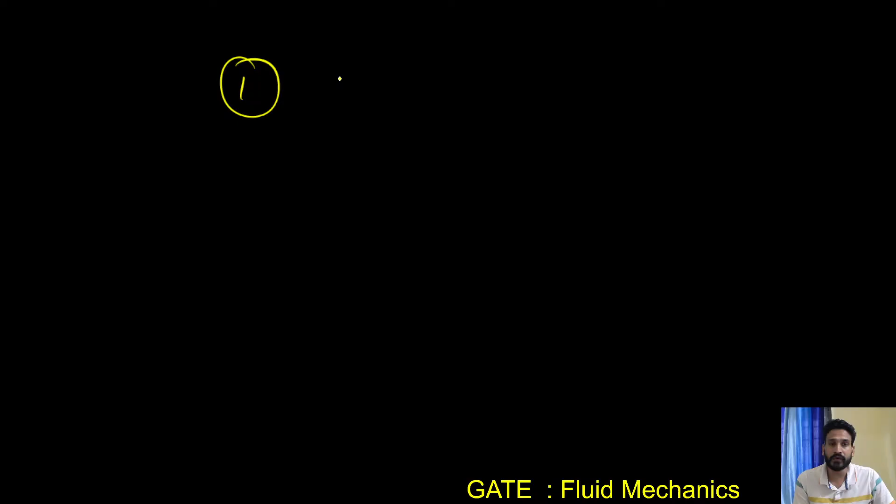One is those fluids which follow the Newton's law of viscosity, and other fluids which don't follow the Newton's law of viscosity. So we have two broad categories, and majorly...

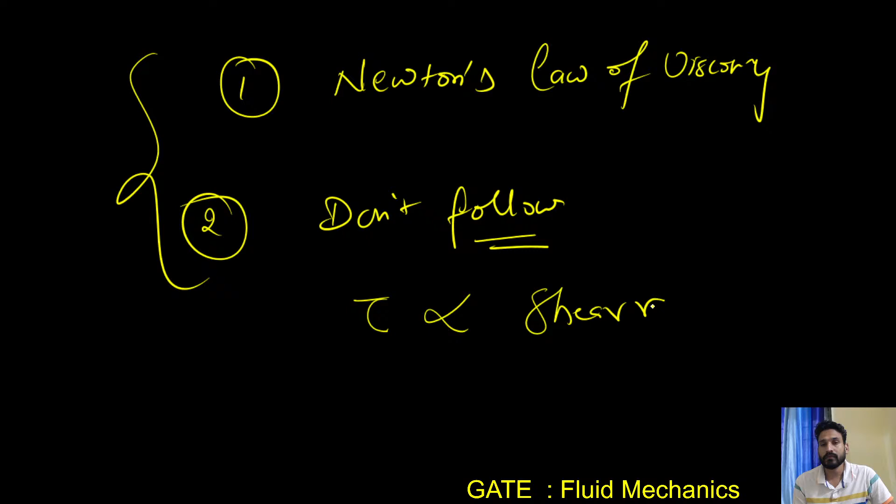Tell me if this is clear to you. In these two types of fluid, we basically discuss the variation, or the relationship between tau and the shear rate, or the velocity gradient. Is it clear to you? Or we have discussed the viscosity relation with respect to the shear rate.

So in this category we have discussed the relations between tau and shear rate, or mu with the shear rate. I hope the previous class is clear to you, and we have discussed the graph as well for all kinds of liquids, or fluids.

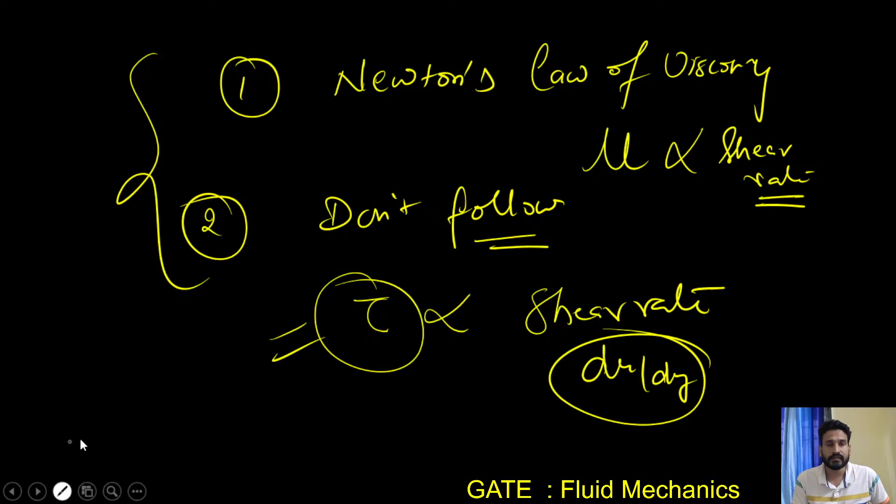Now we have two other fluids, which are basically time dependent. So the next heading is time dependent fluid.

So we have discussed the time dependent fluid. We have two fluids which are time dependent. One is the thixotropic.

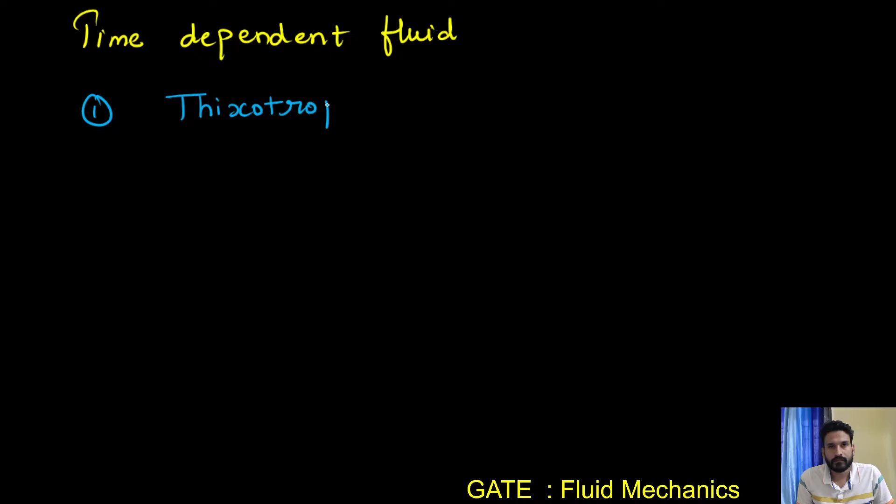Thixotropic fluids are those fluids which have the variation of the apparent viscosity with respect to time at a constant shear rate.

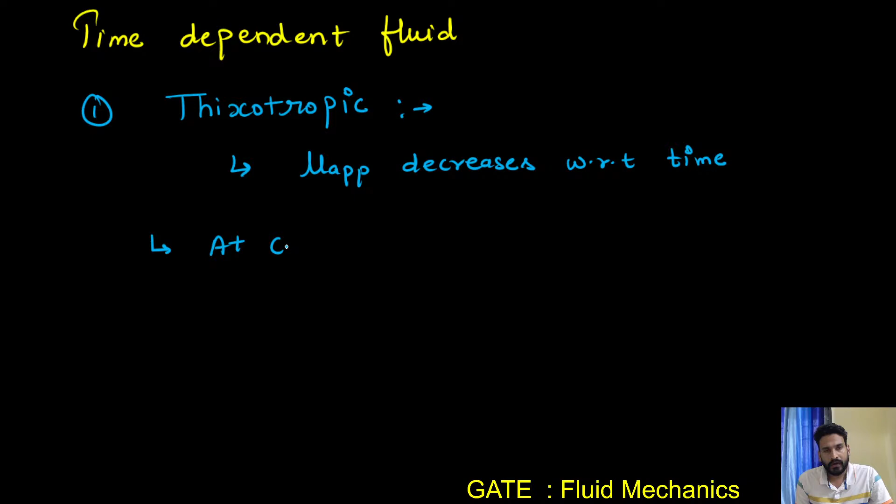So in thixotropic fluids, apparent viscosity basically decreases with respect to time. Second point: at constant shear rate, shear stress, which means tau, decreases with time to a minimum value. So thixotropic is that fluid which has apparent viscosity decreasing with respect to time, and at constant shear rate, tau decreases with time to a minimum value.

And the second statement you have to remember is that at constant shear rate, my shear stress, meaning tau, basically decreases with time to a minimum value.

Here are some examples for thixotropic, like paint, ketchup, honey. These are some examples for thixotropic. Guys, remember these examples are also important.

From this topic there are kind of two questions. One is the variation, whether it's mu with respect to time, or mu with respect to shear rate. Another question may be about the examples, like what kind of fluid is paint. In different PSU exams, they're highly likely to ask about examples, but in the GATE examination they will ask based upon the equation of the fluids and the variation. So both pieces of information are important for us.

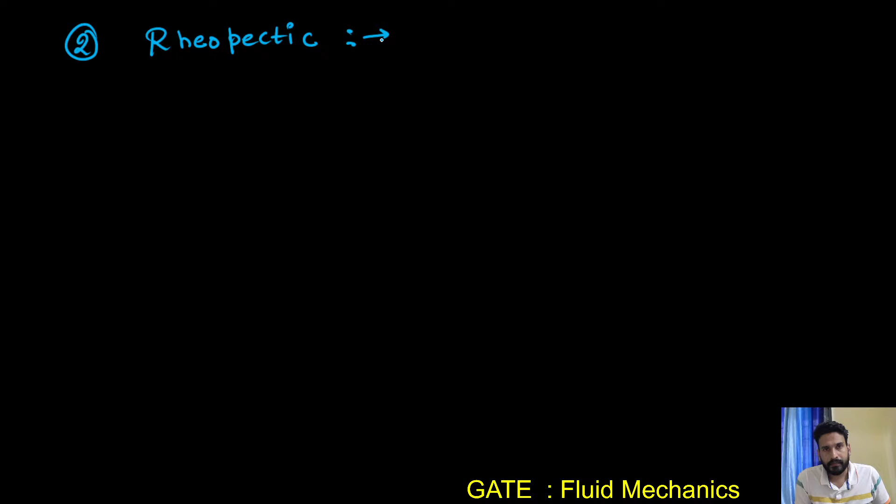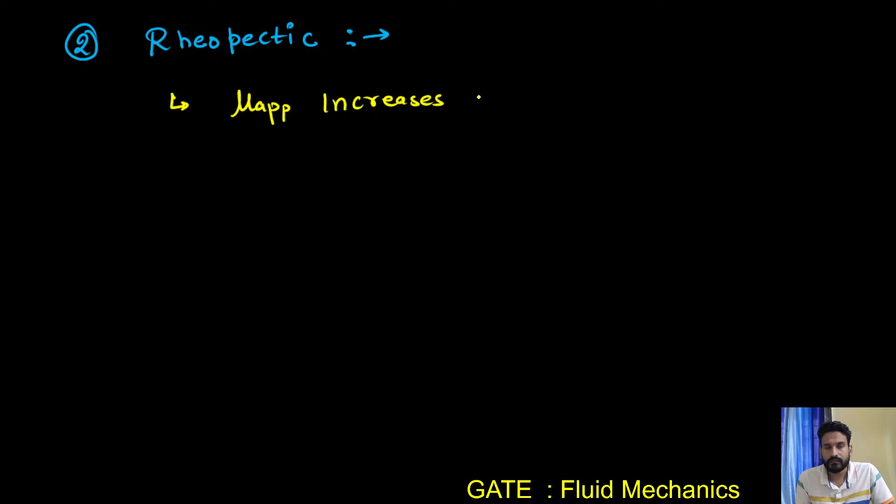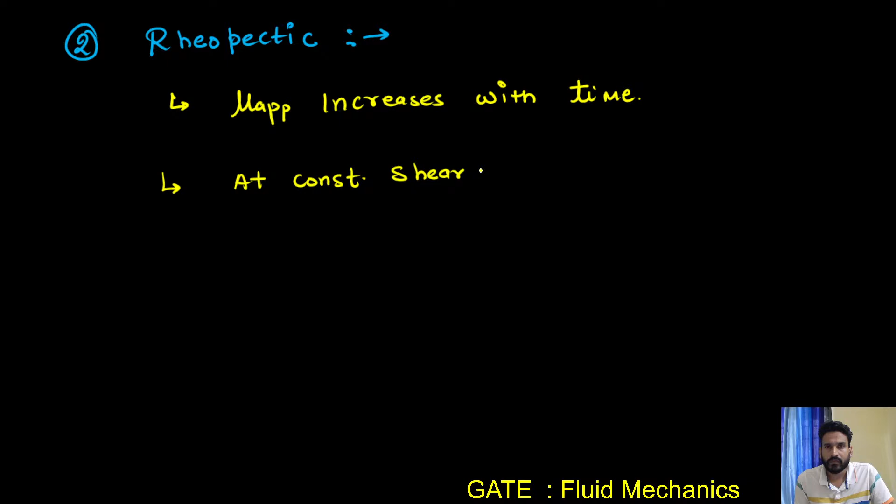In rheopectic fluids, apparent viscosity increases with time. And the second statement is: at constant shear rate, shear stress increases with time.

Right? Here are some examples, like printer ink, gypsum suspension, and bentonite clay.

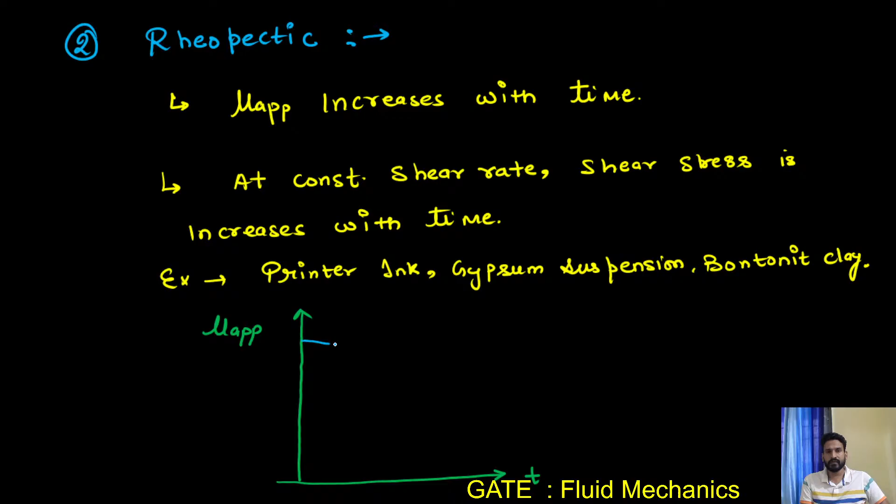So these are some examples for the rheopectic, right? So if you see the variation, or the graph, at the x-axis it is T, at the y-axis it is mu apparent. In thixotropic, mu basically decreases with time, so this kind of graph you will get in the case of thixotropic. And for rheopectic, mu apparent basically increases with time, so this kind of graph you will get.

So basically the question is something based upon the variation, that which fluid has the mu apparent increasing with time. This kind of question they may ask, right? Is it clear to you guys?

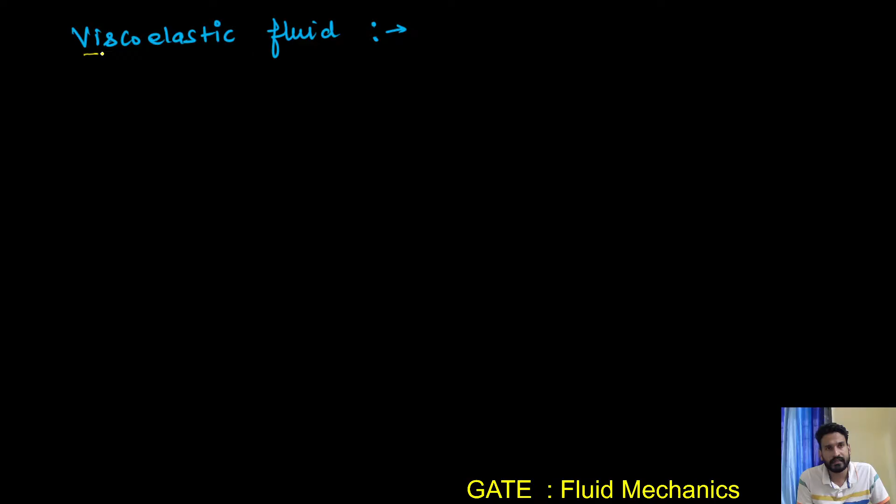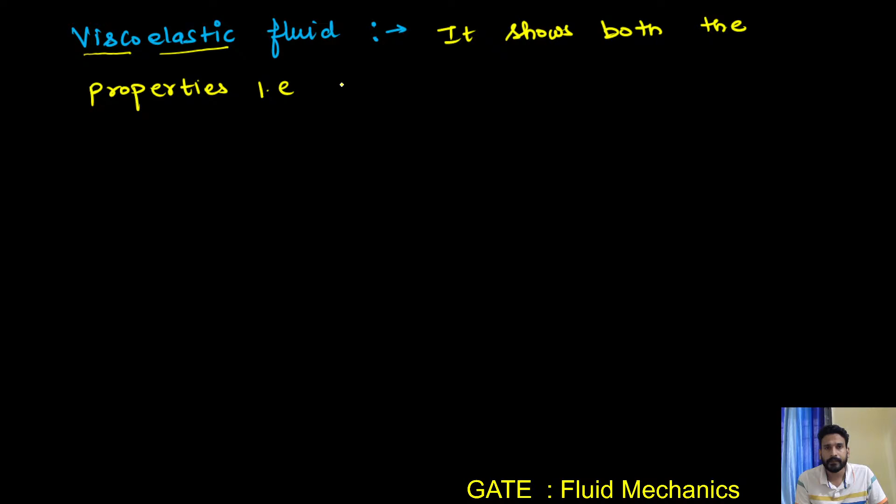Just remember the definition, right? Viscoelastic fluid. So as the name suggests, this fluid has both the properties. Visco means this fluid is viscous, and elastic means that this fluid has elastic properties also. So we can say that it shows both the properties, such that viscous and elastic, right? So it basically exhibits elastic recovery from the deformation.

What is the meaning of elastic property? Elastic property is something like that: due to this property, if you deform any matter, any object, it will try to regain its original shape. Like rubber is the elastic material, right? If you stretch that rubber, the state after stretching is not the same as initial, it is basically in the deformed state. Once you remove the stress on the rubber, it will try to regain its original shape. So more elastic, more chance to regain its original state.

So what are the materials which are perfectly elastic? Perfectly elastic materials are the ones which regain their initial shape and size exactly. They exactly come back to their initial shape and size. But most metals are not perfectly elastic, there is some deformation there. If you apply shear stress to any material, it will deform up to some extent, and after removal of shear stress, some deformation remains within it. Is it clear to you?

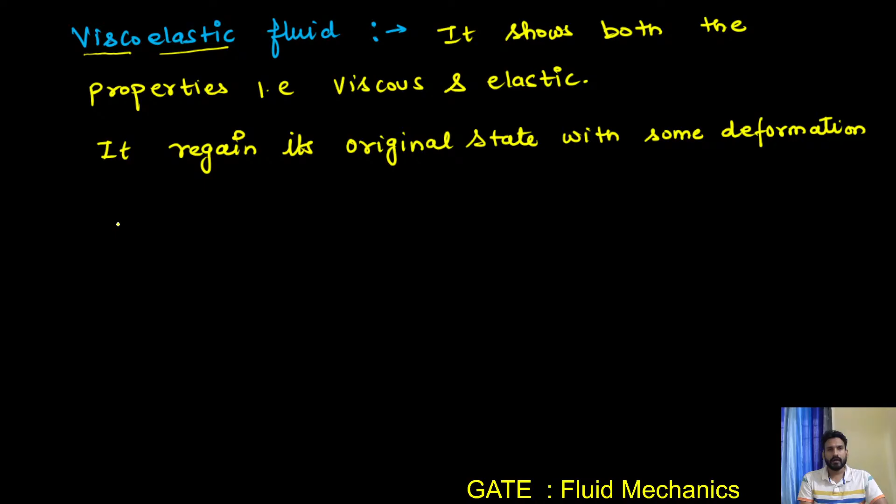So I can write that it regains its original state with some deformation, after removal of shear stress, right? And examples are flour dough, and some polymers in molten state, right? So these are some examples.

It's a very simple thing. Many times questions come on these definitions and names, especially in the PSU separate exams, right? So we will try to cover all the things for the GATE examination, for the PSU examination, and from the interview point of view also. So we will try to cover all the things. Is it clear to you guys?

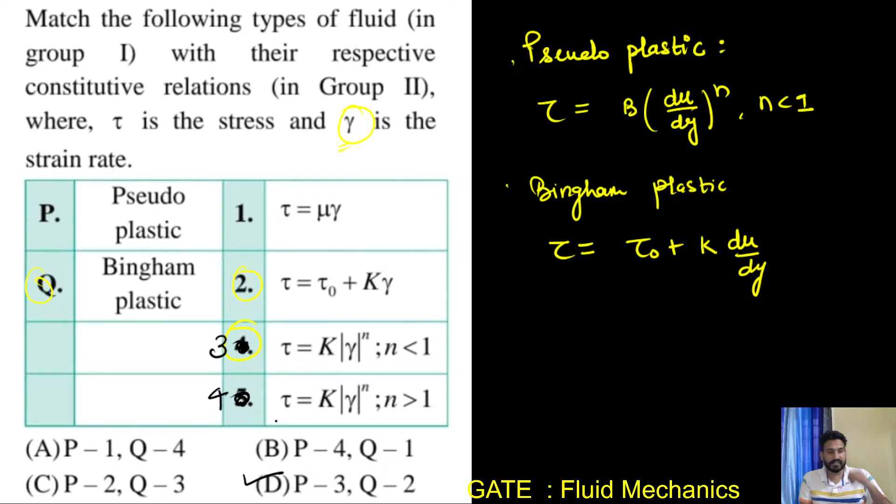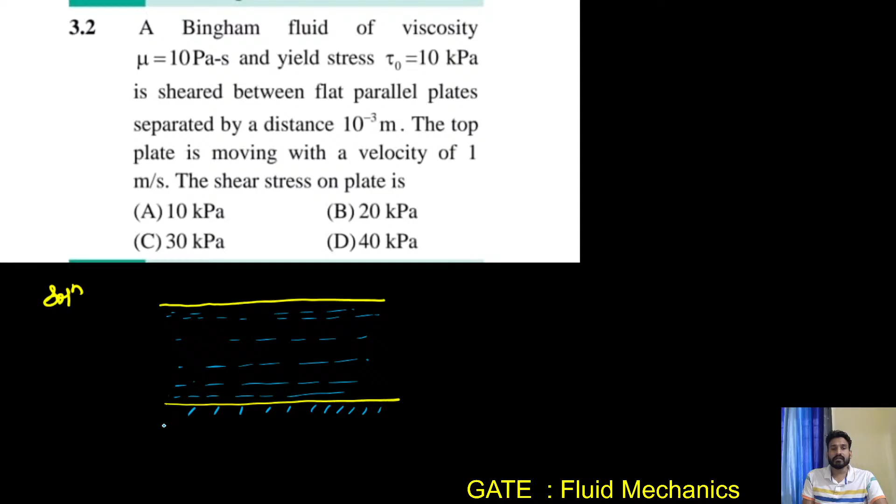So this is the scenario in this question, these are the flat parallel plates and a Bingham fluid of viscosity 10 pascal second is placed between these plates. The lower plate is stationary, and the upper plate is moving with a velocity of 1 meter per second.

Right? So always remember this information in this way: the layer which is in contact with the plate, the velocity of that layer is exactly the same as the velocity of that plate, right? So just remember this information like that.

So the bottommost layer is in contact with this stationary plate. The stationary plate has velocity 0, so this fluid layer velocity is also 0. And we know that this is the no slip condition. And the adjacent layer has the velocity the plate has. So what is the velocity of this plate? 1 meter per second. So the layer velocity is also 1 meter per second. Is it clear to you?

Okay. Now we have to find out the shear stress. Here a Bingham fluid is there, so we have the equation tau is equal to tau naught plus mu du upon dy. We have this yield stress. So just calculate the velocity gradient here, du divided by dy. Du is basically the change in the velocity, right? So this is 1 minus 0.

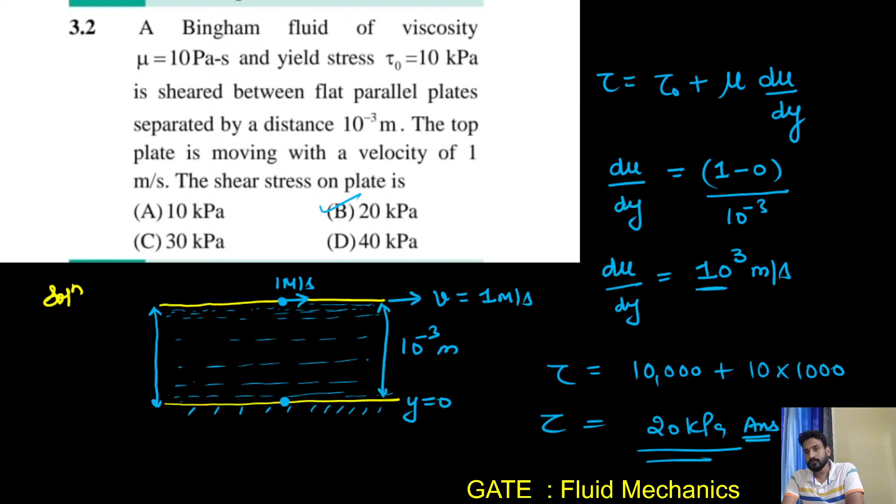Okay. If you have any doubt, you can ask. ठीक है? There is no requirement to repeat this statement again and again, because you guys are mature enough. है ना? आप सब बीटेक पास आउट हैं. ठीक है? So I think there is no need to tell you, okay, पूछो, like that.

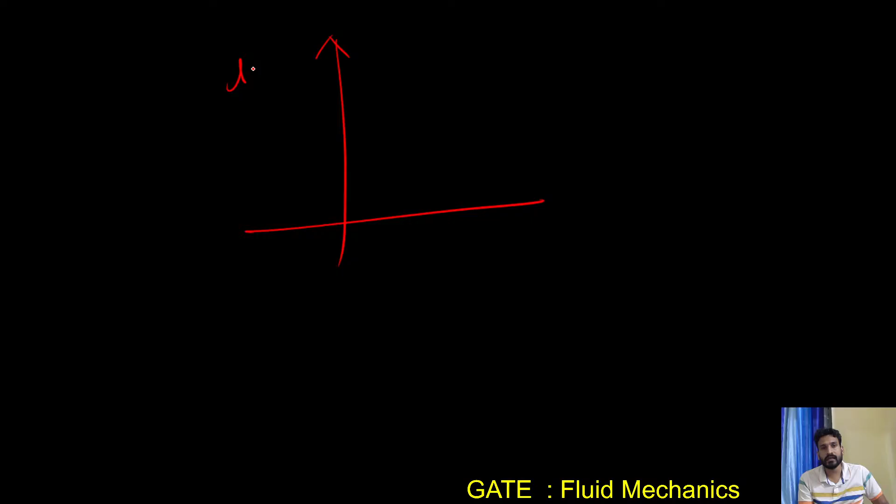So I have given you a graph between the apparent viscosity and the shear rate, where I explained that this kind of graph we will get for the pseudoplastic. This is the mu apparent and this is the shear rate, or you can say du/dy. For the pseudoplastic this kind of graph we will get, and for the dilatant this graph. If mu app is increasing with du/dy, the fluid must be dilatant, and if it is decreasing, it must be pseudoplastic.

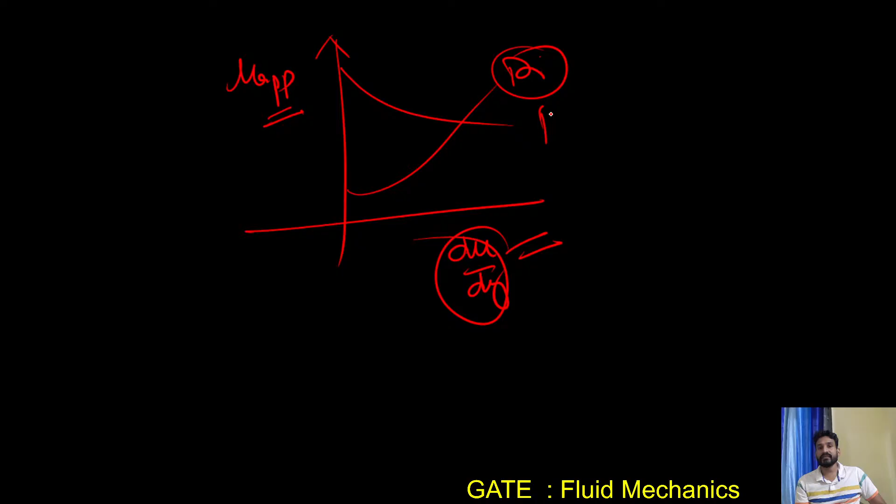So let's calculate the mu apparent yaar.

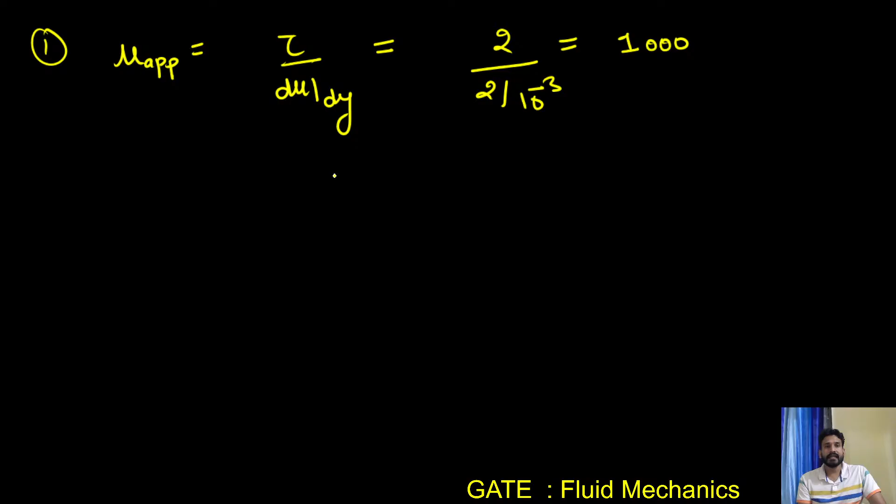Is it clear to you guys? It is 1000. Okay, let's take the second experiment and calculate the mu app. Let's suppose this is mu app 1 and this is mu app 2. What is the tau value? 3, divided by du which is 1, divided by dy which is 0.25 multiplied by 10 raised to power minus 3. Right, minus 3. Yes, it is 10 raised to power minus 3. Okay.

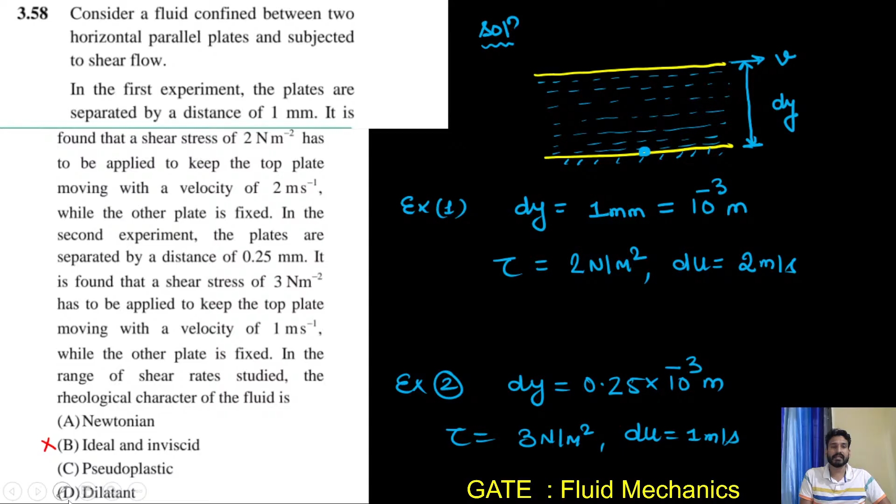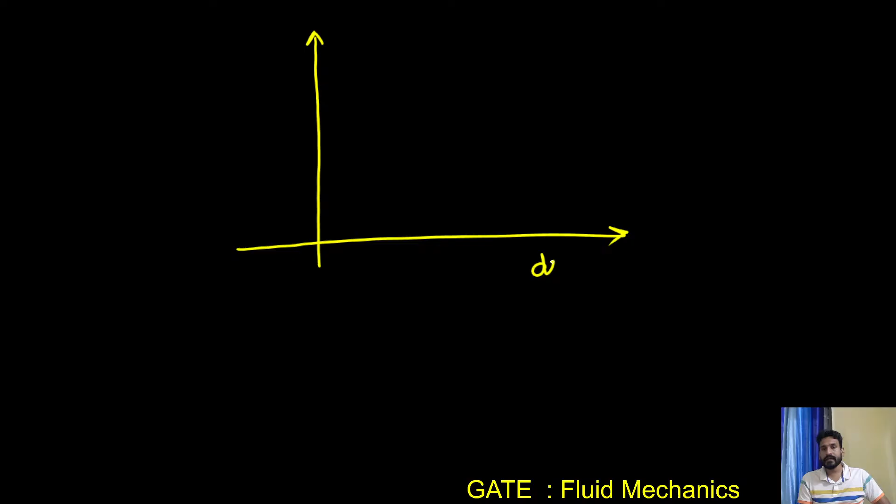So this kind of behavior we will get in the pseudoplastic. Is it clear to you? Yes or no? Arre, this is what I told you, this is the relation we noted, na? This is the shear rate and this is the mu apparent. If it is decreasing, then it is pseudoplastic, or if by increasing du/dy it is increasing, then it is dilatant.

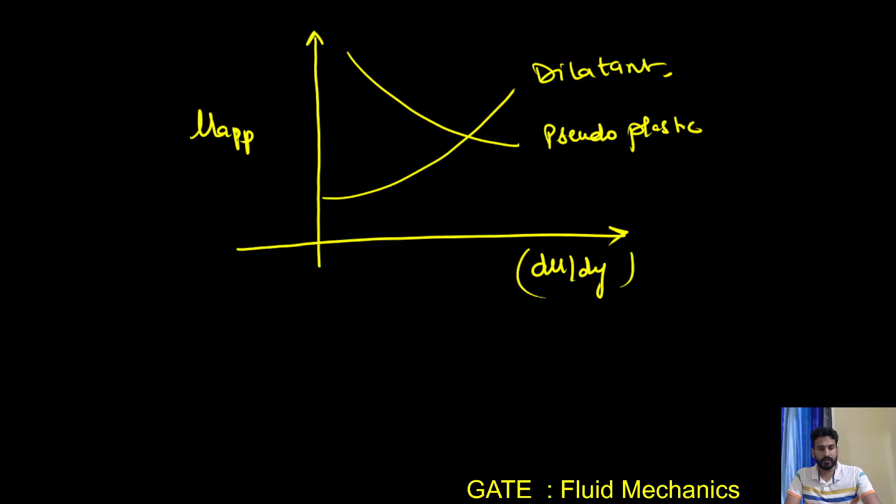The first part is completed, in which we have studied all the properties of the fluid. Is it clear to you? Now let's come to fluid mechanics. There are two parts of fluid mechanics: one is fluid statics and another is fluid dynamics. One is fluid statics and another is fluid dynamics.

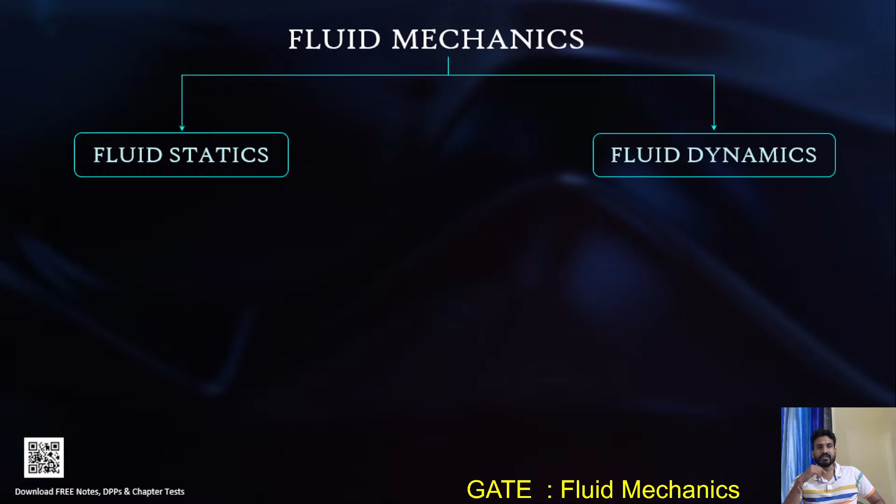Now, sir, what is fluid dynamics? Fluid dynamics means the fluid is moving. In what sense? See, if there is no relative movement between the fluid layers, that comes into the category of fluid statics. In the first case there is no movement between the fluid layers. In the second case also there is no movement between the fluid layers.

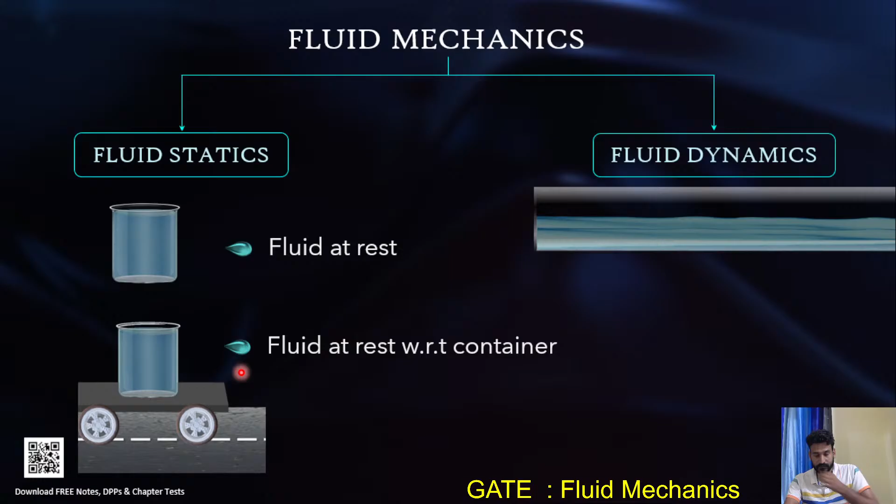Now see guys, we will study fluid statics and fluid dynamics from the force point of view. So what is the meaning of force, sir? See, we have two kinds of force. One is the body force, and another is the surface force.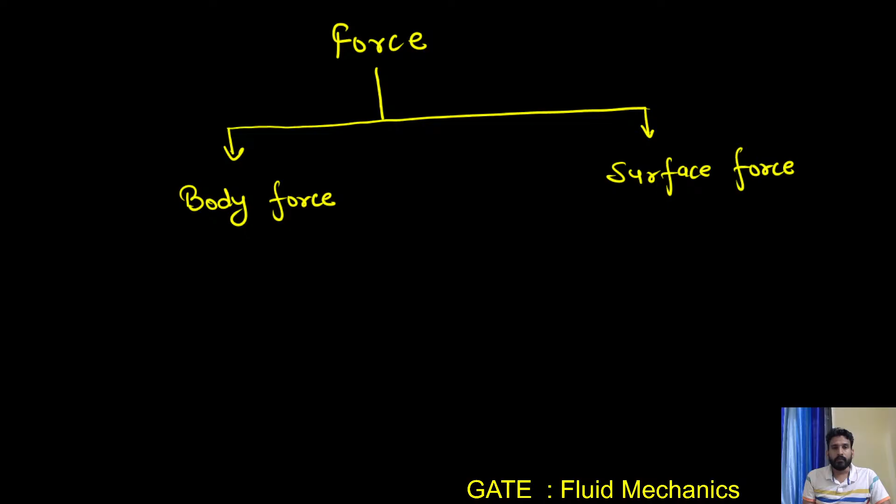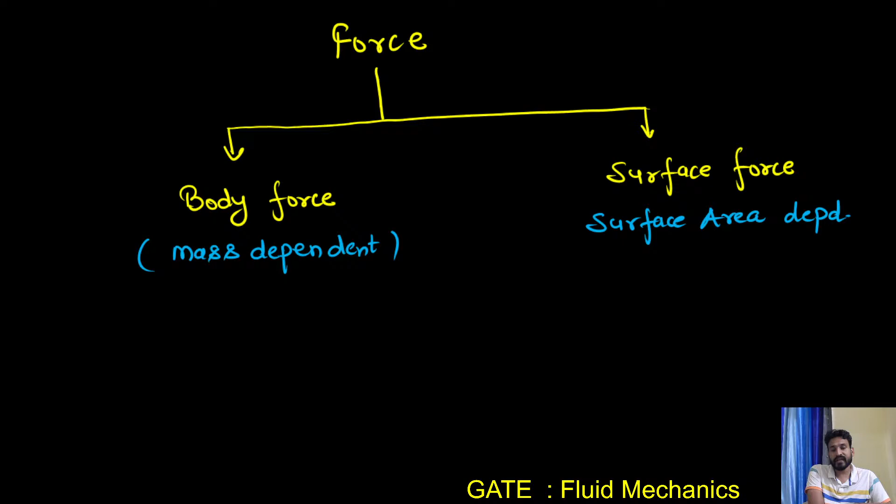You will say, sir, what is the meaning of body force? Body force means the force which is mass dependent. Is it clear to you guys? And surface force is surface area dependent. Sir, which forces come into the category of mass dependent? For example, weight force.

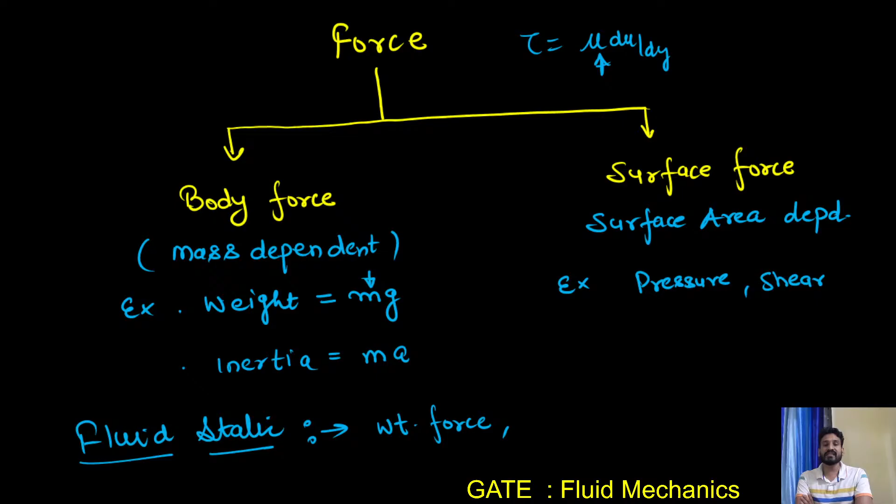Viscosity comes into the picture when there is relative motion between the fluid layers. But in the fluid static, there is no relative motion between the fluid layers, so there is no viscosity discussion there. So shear stress is also 0 here. Another is the pressure force. We will study the pressure force.

So in the fluid static, we consider the weight force and the pressure force. The inertia force and the shear force will be absent. As we move toward fluid dynamics, these two forces, inertia force and shear stress force, also come into the picture. So in fluid dynamics, we will study all the forces: weight force, inertia force, pressure force, shear force. Is it clear to you?

Sir, how is shear surface dependent? What is the shear stress, beta? I had also explained it with a question.

Let's suppose this is an element and F force is applied on this surface A, right? If it makes the angle theta to the horizontal, there are two components of this force: F cos theta and F sin theta. So how do you define the shear stress? We define the shear stress as this tangential force divided by area. So we consider the area in tau. Yes or no, beta? So in this context, it is surface area dependent.

Is it clear to you, Kia? So surface area force. Okay, let's take one example also. Let's suppose somebody is... let's take an example. An example was just coming to mind.

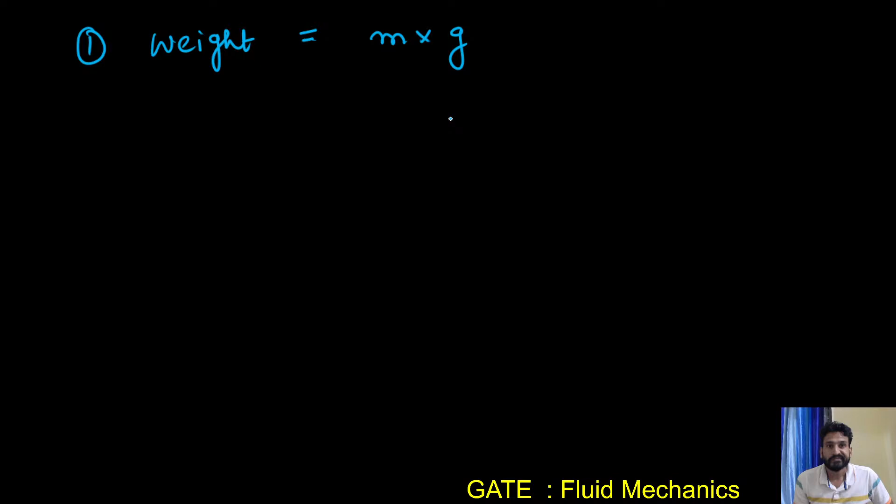In fluid statics, we will consider the forces: weight force and pressure force. So we have a discussion of pressure and weight, right? Weight is very simple. Weight is basically mass into gravitational acceleration. Weight is nothing but m into g.

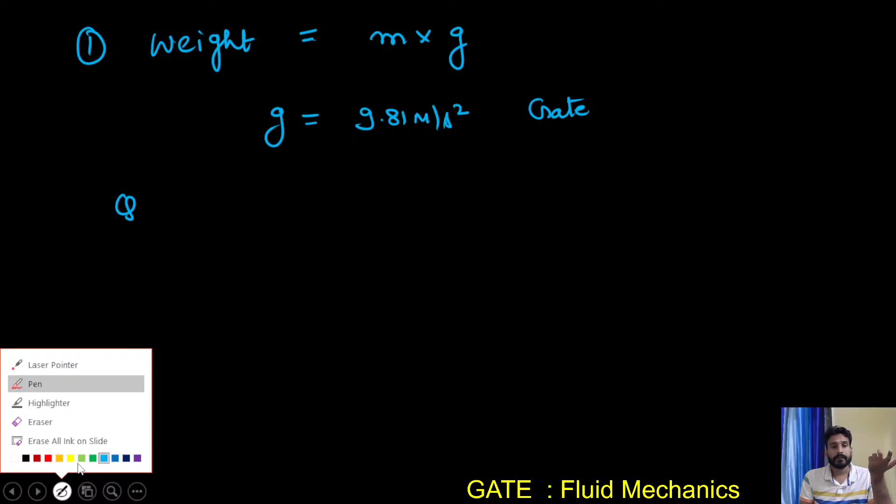Always take g as 9.81 meter per second square in the GATE problem. Never take it as 10 meter per second square. If the question is giving you this approximate value of 10 meter per second square, only then you can take this value. Otherwise consider 9.81. Is it clear to you? Only if this is given in the question.

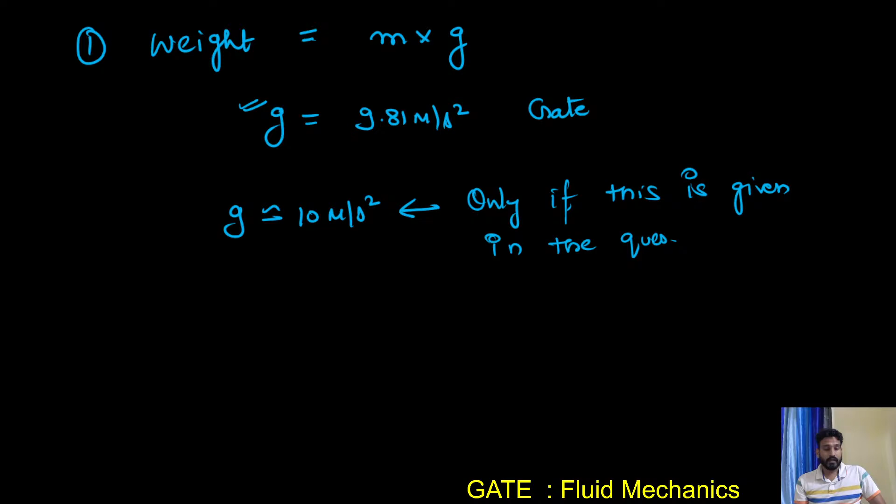Okay guys, so let's discuss the other force which is pressure. We will have a good discussion about pressure, right? So let's discuss about pressure. We have a long discussion of pressure, right?

Okay, now while I drink water, can someone tell me the definition of pressure? What is the definition of pressure? Right or wrong, whatever it is, you tell me. Can you tell me the definition of pressure, guys?

Force per unit area. Normal force exerted per unit area.

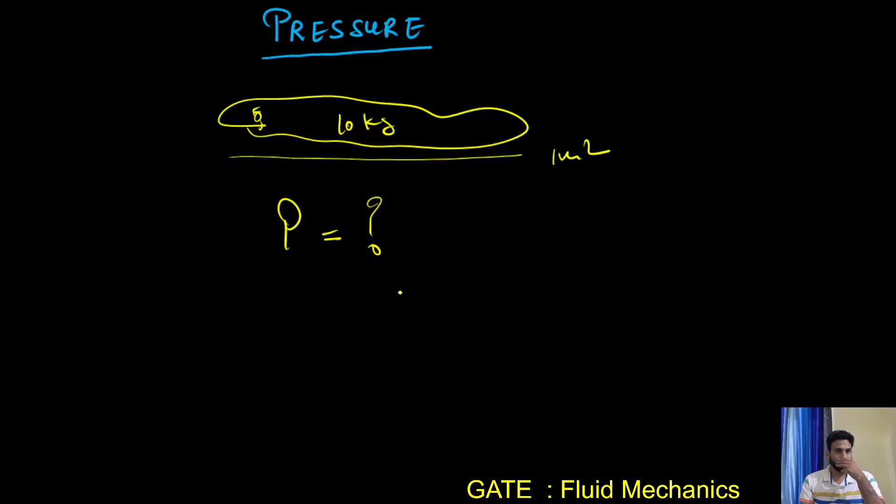Anybody? 98.1 Newton.

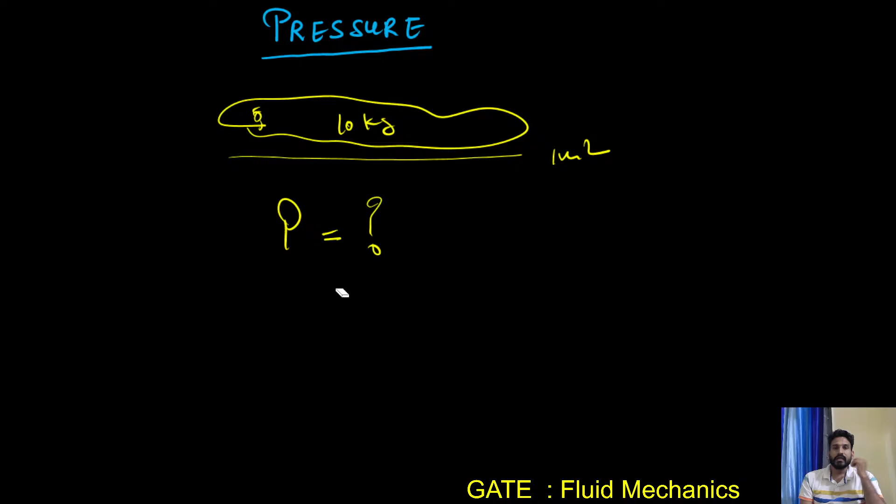I am talking about pressure, but you are giving me the units of force. How can Newton be the pressure here? Okay, so it should be Newton per meter square, it is 98.1 Newton per meter square. And whoever has answered, after this discussion tell me separately whether you were saying correct or wrong.

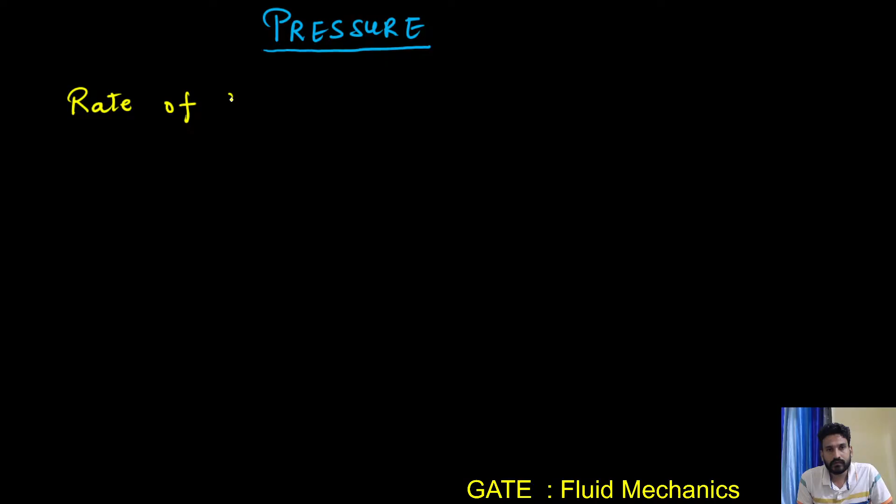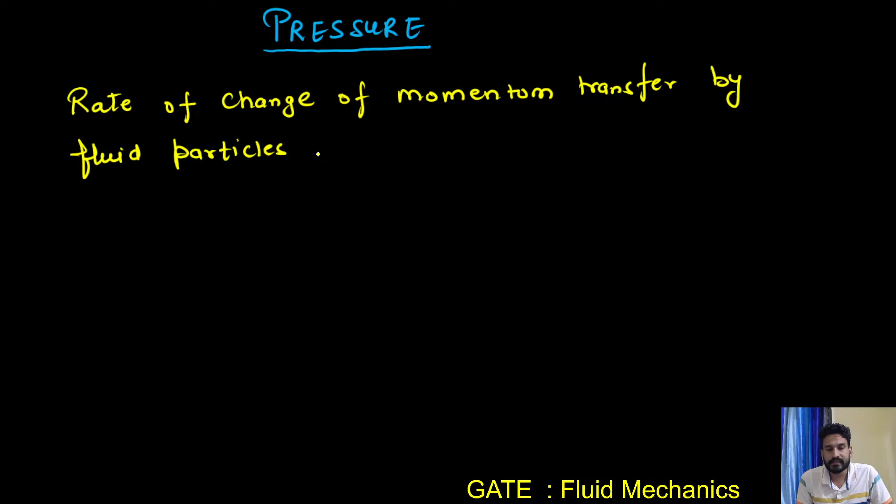After this discussion, okay, now see the definition of pressure. What is the definition of pressure? Just unfold this mystery. The definition of pressure is: it is the rate of change of momentum transfer by fluid particles normal to the surface.

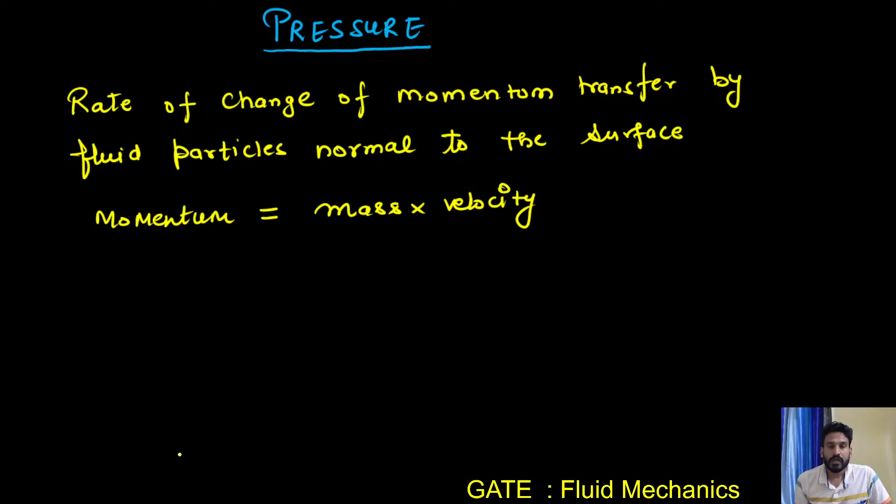Right, what is momentum, does anyone know? What is momentum? Momentum is basically mass into velocity. This is basically your momentum. So the meaning of this definition is something like that.

So we say there is a change in momentum if there is a change in velocity, considering the mass is the same. If velocity is changing, we say momentum is changing. So fluid particles are coming towards this solid wall, or any solid matter, strike it, change the velocity, and we can say this is the rate of change of momentum transferred of the fluid particles normal to the surface.

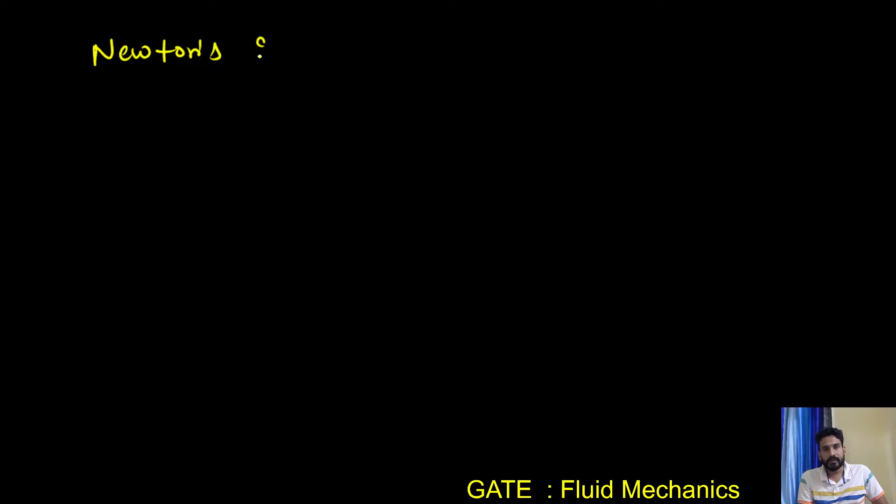And that is basically we consider the rate of change of momentum transfer only normal to the surface. Is it clear to you? So if you remember, the rate of change of momentum transfer is basically the force. By Newton's second law statement, that rate of change of momentum is equal to force.

So this is basically the rate of change of momentum, meaning it is force, and which force? Normal force. So the fluid particles which are exerting force on the normal surface, normal to the surface, consider that force per unit area, that is your pressure. Is it clear to you? I hope it is clear to you guys.

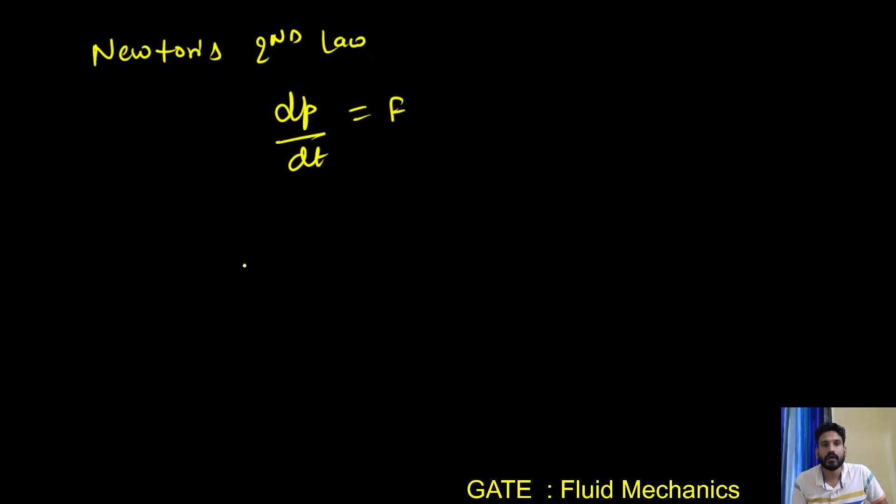Alright, correct. Now second, let's define the absolute, first one, absolute zero pressure. What is the absolute zero pressure?

So absolute zero pressure means there are no fluid particles, there is no momentum transfer. Or we can say the fluid particles are dead. What is the meaning of fluid particles are dead? That there is no motion of the fluid particles. If there is no motion, they cannot strike the solid surface and the momentum cannot be changed. So that situation is called absolute zero pressure.

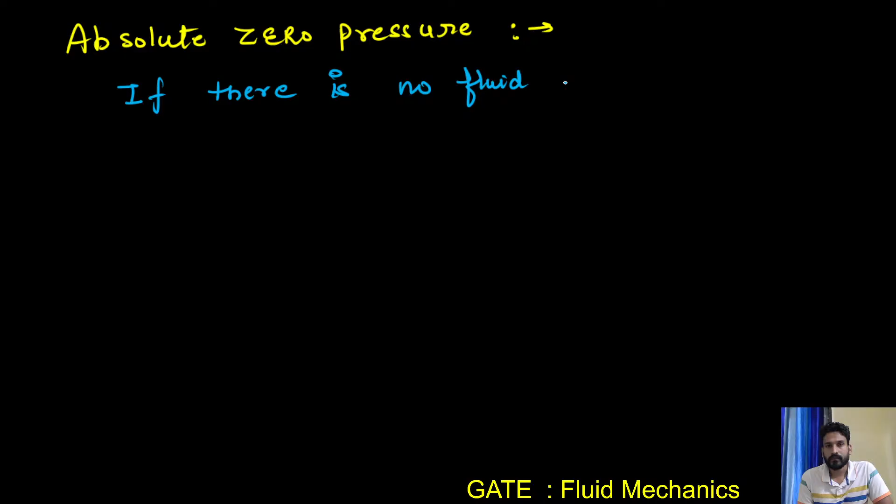So I write the definition here: if there is no fluid particle and all fluid particles are dead, then that state is defined as absolute zero pressure, right?

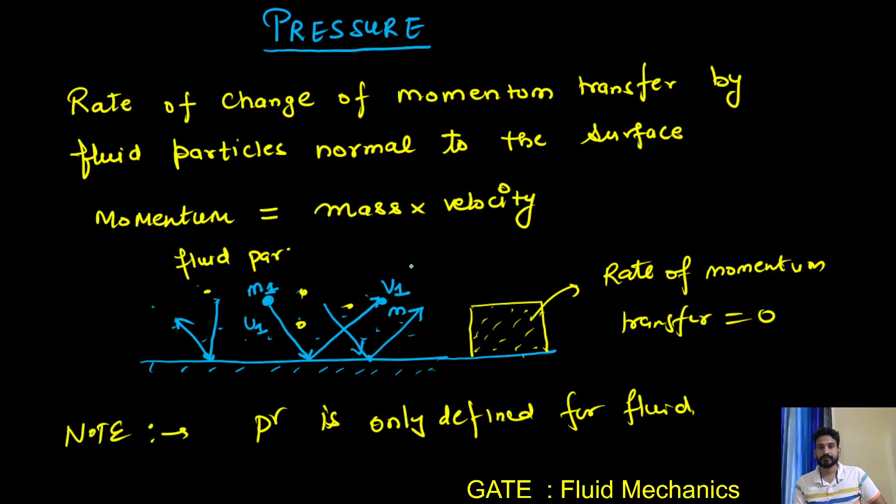So absolute zero is when there are no fluid particles, or you can say the particles are dead. In that case we say it is the absolute zero pressure. Is it clear to you guys?

Now what is the absolute pressure? This is the second definition, absolute pressure. Absolute pressure is defined as any pressure taking absolute zero as a reference. I'll let you know what is the meaning of taking absolute zero as a reference. Any pressure taking absolute zero as the reference is known as absolute pressure. What is the meaning of taking the zero as a reference? Let's see.

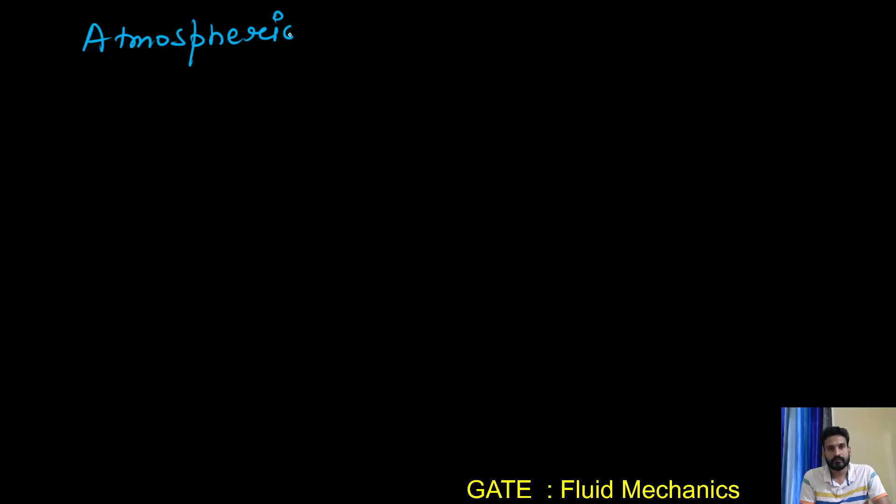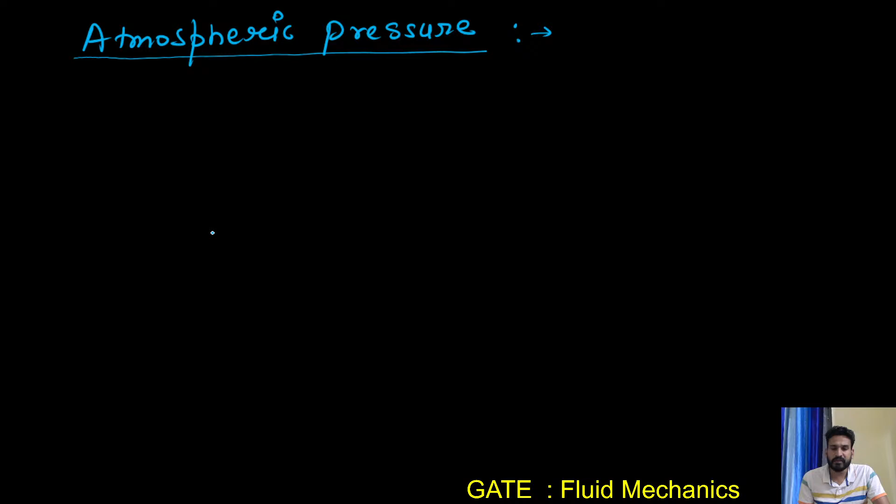Let's suppose we are talking about the atmospheric pressure. What is the meaning of atmospheric pressure? Let's suppose this is our earth, and we know that earth is surrounded by the atmosphere. What is the meaning of atmosphere? The earth is surrounded by fluid.

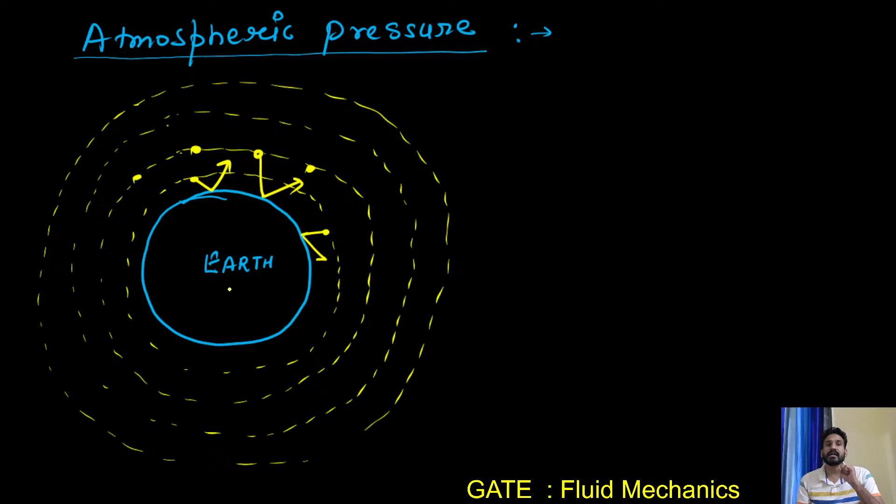Earth is surrounded by some fluids, or gas particles, around the earth. There may be, I think in geography, 4 to 5 layers - troposphere, mesosphere, like that. So these are the fluid which is around the earth. The fluid particles are striking the earth's surface and going, striking and going. So there is a momentum transfer of these fluid particles on the earth, and due to this momentum transfer, the pressure exerted on the earth is called the atmospheric pressure.

Okay, clear? So whatever atmospheric pressure is, this is basically measured from the absolute zero. If somebody asks what is the atmospheric pressure of the earth, we need to take absolute zero as the reference - we do need to take a reference, right?

Let's suppose you are on your terrace. If somebody asks you what is the height of 4 floors, 4 buildings above, you have to take some reference, because from the ground level it is different, from the first floor it is different, from the second floor it is different.

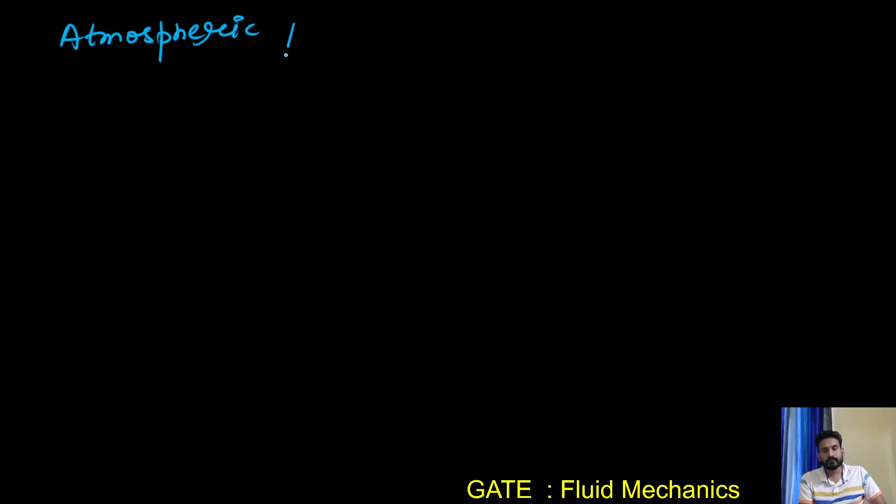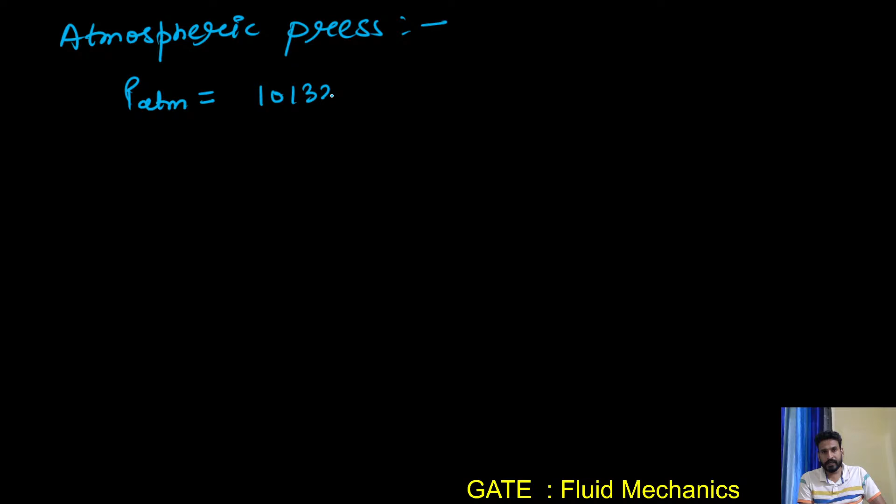Atmospheric pressure, the value of the atmospheric pressure on the earth, PATM, is 101325 Pascal or 760 mm of Hg or 10.33 meter of water. These are some values of the atmospheric pressure.

What are these values and how do we calculate them, how do we decide that the atmospheric pressure is 760 mm of Hg or 101325 Pascal? We will discuss this. For the calculation of the atmospheric pressure, an experiment is done. Let's understand that experiment.

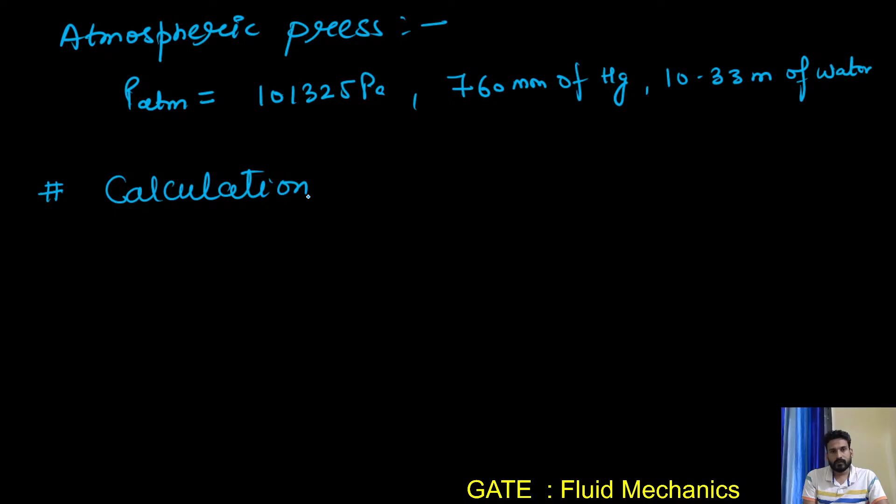Okay, so let's take the heading: calculation of the atmospheric pressure. So we have a container here, and mercury is filled in this container.

All this experiment is basically performed at the mean sea level. Why at the mean sea level? Because the sea level on the earth is the same everywhere, so there will be no variation if you perform this experiment at the mean sea level.

Let's take a tube here which is inserted here. And let's suppose I have a pump, a compressor here. This compressor will take out whatever air is inside this tube. Let's suppose the compressor is at 50% efficiency, meaning it removes 50% of the air here.

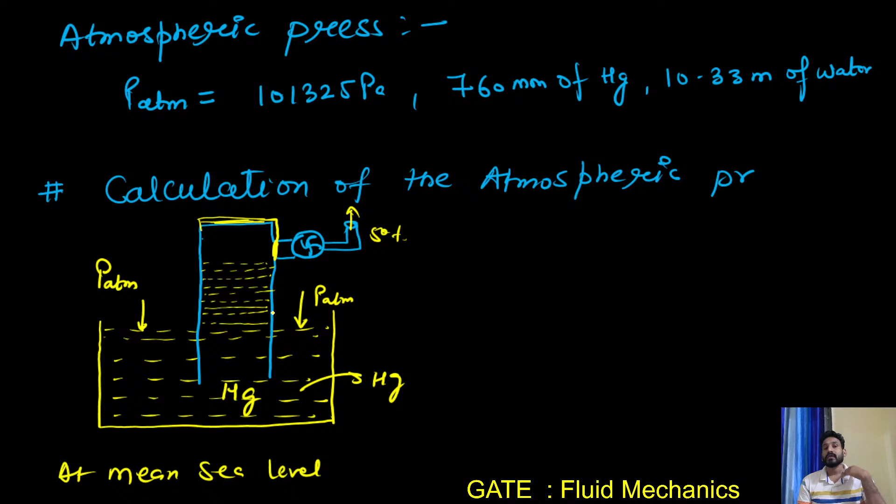Means there is a vacuum inside this tube, right? So let's suppose the height of the mercury is something like this, and this tube is closed. So basically in this experiment there must not be any air particles inside this tube. For that I explained it using a compressor, because we have to remove the air particles, or basically we have to consider the vacuum here, right? So mercury goes upward and at a certain value it stops.

And why does it stop? When the pressure at this point is equal to P atm, then this level will be at a constant value. It will not increase or decrease, because at this horizontal level the pressure is the same. If the pressure is not the same, let's suppose this pressure is low and this pressure is high, then this height will increase, right? So at a certain height, the pressure on this horizontal level is P atm, and the height recorded is 760 mm.

And what is the fluid? Mercury is the fluid, so it is 760 mm of Hg. So we will say that 760 mm of Hg exerts a pressure equal to P atm. Am I clear to you? The atmospheric pressure in terms of height is 760 mm of Hg. I hope this is clear to you.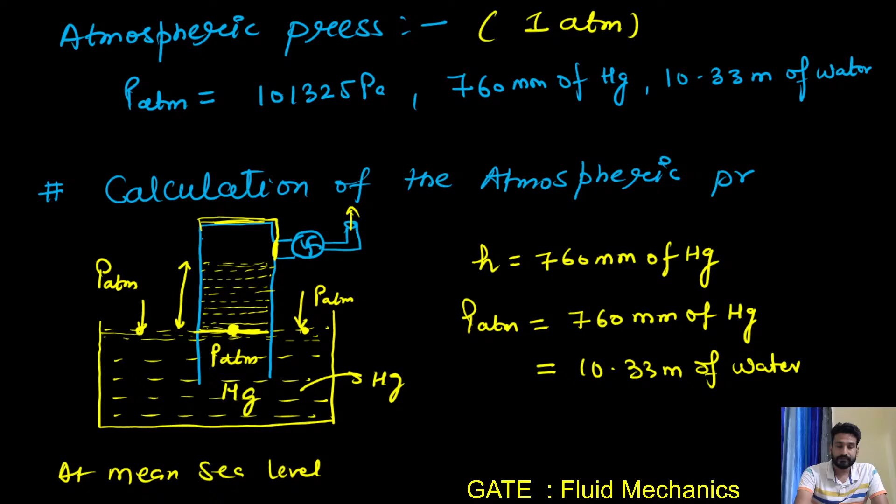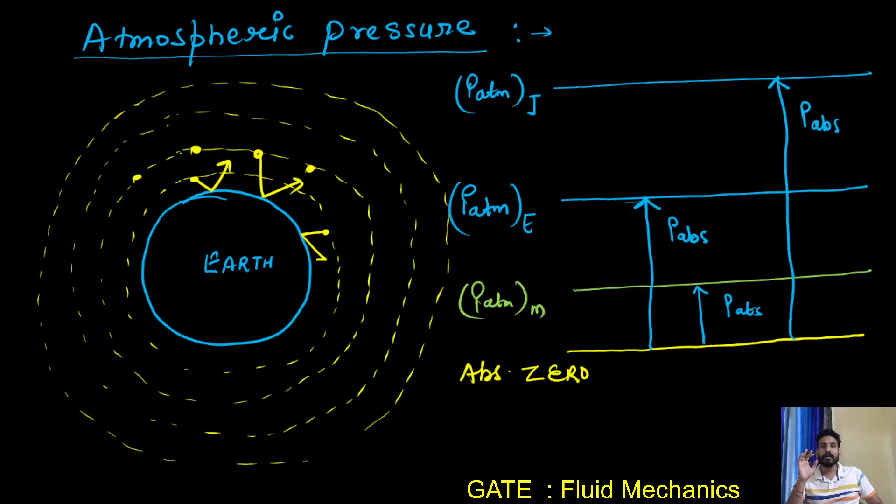Let's go, we will discuss this 101325 Pascal after defining the pressure in the liquid. Okay, now see, what is the absolute pressure? What is the atmospheric pressure? We know that. What is the absolute zero pressure? We know that. What is the absolute pressure? We know that. Now the next term is the gauge pressure. Put the heading gauge pressure.

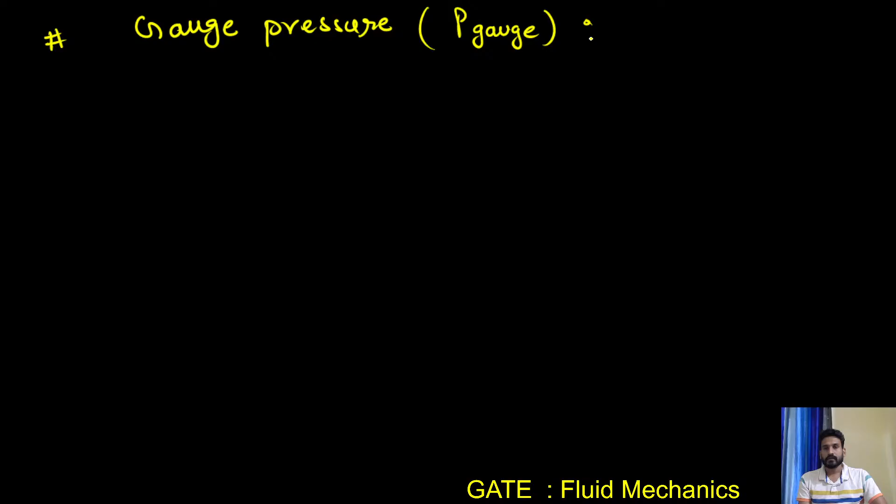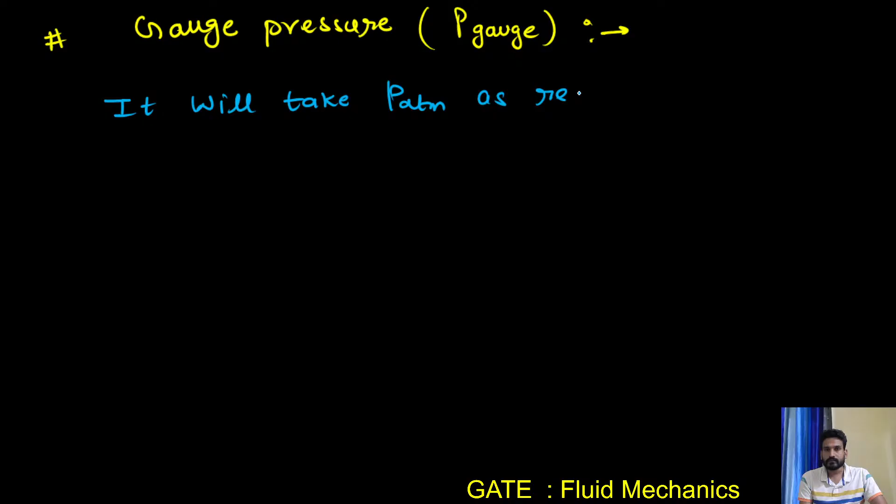Gauge pressure, right? So let's define this as the P gauge. What is the gauge pressure? Absolute pressure takes absolute zero as the reference. Likewise, gauge pressure takes PATM as the reference. So gauge pressure will take PATM as a reference, and absolute pressure takes absolute zero as a reference.

Okay, let's understand this with the help of a diagram. So guys, this is the absolute zero level, the absolute zero pressure. Let's suppose this is the PATM for Mars. Let's take this as the PATM of the Earth, and this is the PATM of Jupiter.

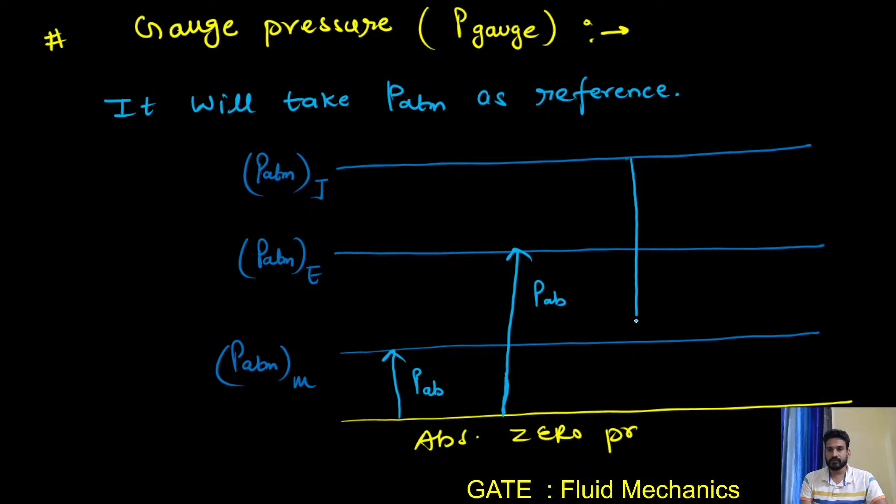So we have discussed the absolute pressure. For absolute pressure, the reference we are taking is absolute zero. This is the absolute pressure for the Earth, and this is the absolute pressure for Jupiter. These are all absolute values. Now, the P gauge is something which takes the atmospheric PATM as the reference.

If somebody asks what is the atmospheric pressure of Jupiter, it will take the Earth's atmosphere as the reference. So we will measure this pressure from here, because for absolute values, absolute zero is my reference level, but for the gauge value, this is my reference level. So this is the P gauge: how much pressure is above the atmospheric pressure of the Earth.

What is the absolute atmospheric pressure of Mars? In gauge terms, this is my reference level, so measure from here. This is, you can say, the negative gauge. Is it clear to you?

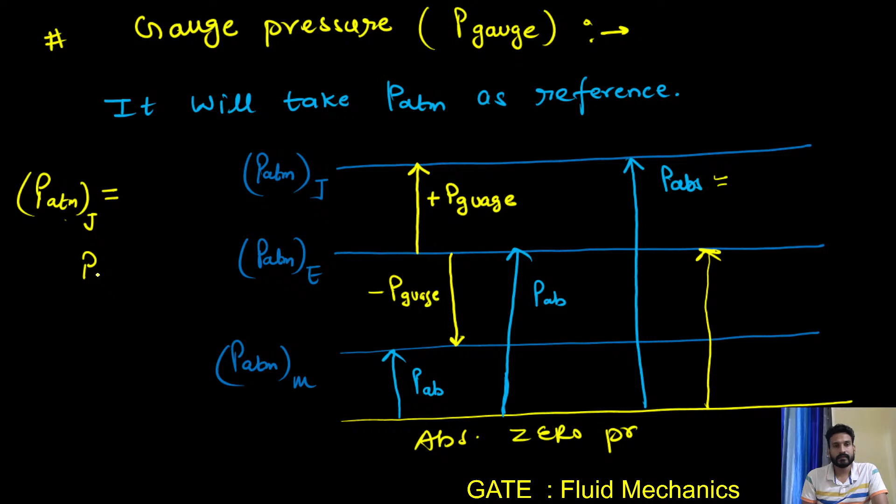Now for Jupiter's atmospheric pressure, if we calculate from absolute zero pressure, this is the absolute term. It is equal to, from here to here, P ATM of the earth, plus from here to there, which is the P gauge. Is it clear to you?

There's no need to write all these things; I'm explaining once, and after that I will write the final equation. If somebody asks what is the absolute atmospheric pressure for Mars, the reference level is P ATM of the earth. To reach the Mars level we have to go downward, so we subtract P gauge. Minus P gauge is also called vacuum.

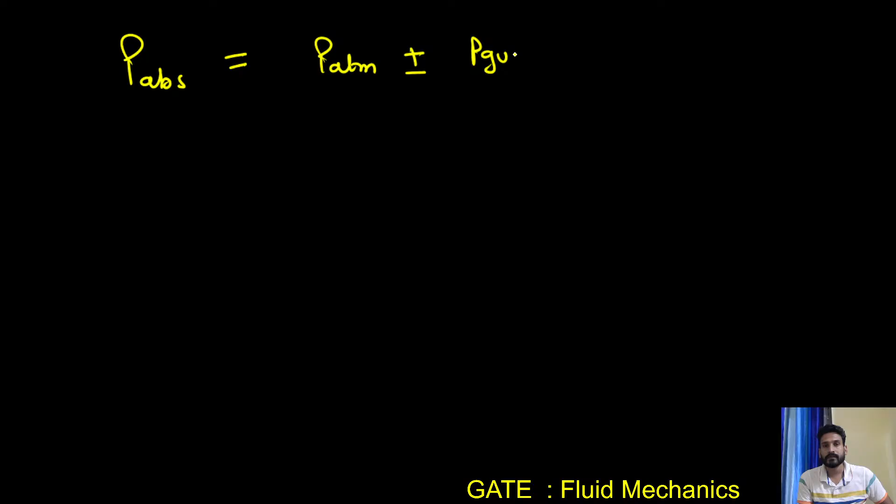So these are my absolute pressures, and to calculate absolute pressure we add or subtract the gauge pressure to P ATM. So this is my final equation: P ATM plus minus P gauge. This is the important equation. Okay guys, let me know whether this is clear to you or not.

In gauge pressure, P ATM of the earth is our reference, and for calculating absolute pressure, absolute zero pressure is our reference. Just remember this equation: for absolute pressure, you add P ATM plus minus the gauge pressure, and the negative gauge pressure is the vacuum pressure.

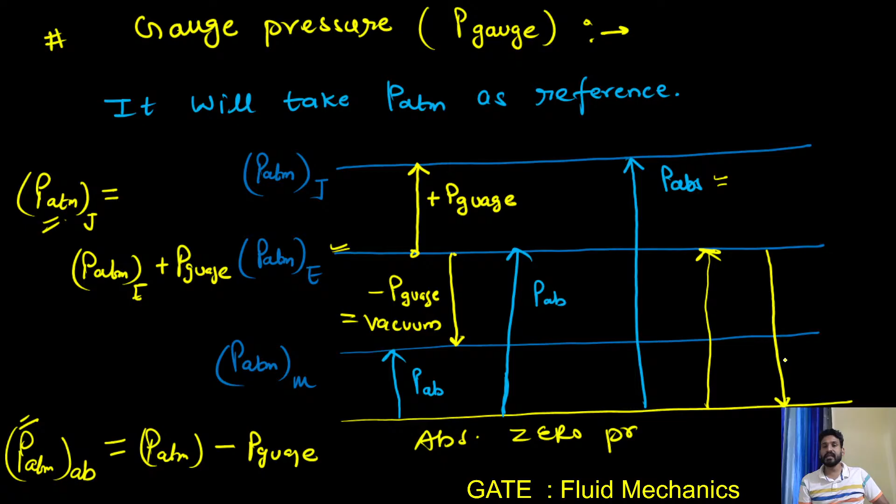Question: is absolute zero pressure the same as the absolute vacuum pressure? We will say no. Absolute zero pressure is not equal to the absolute vacuum pressure, because absolute vacuum pressure can be different for different planets. It is different for the different planets, right?

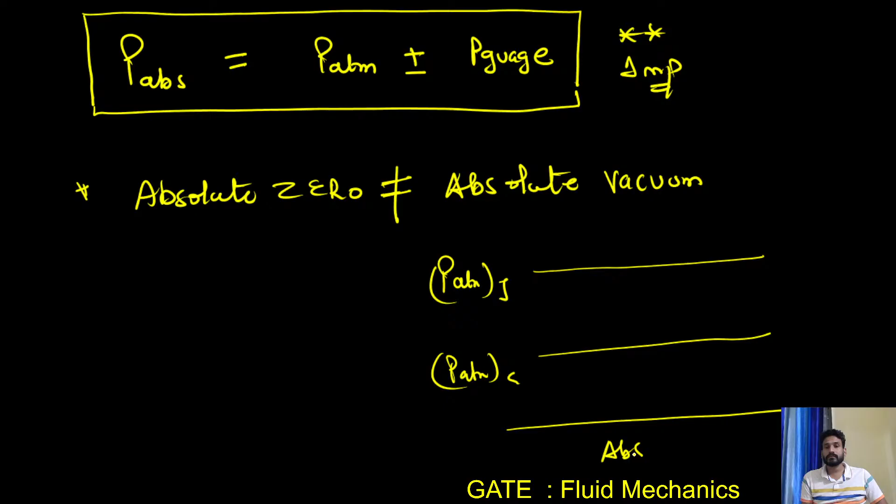Let's take only two examples. This is the P ATM for Jupiter, and this is the P ATM for Earth, and this is the absolute zero. Absolute zero pressure is the same for every planet, but absolute vacuum is different for different planets. Let's suppose my P ATM is 1 ATM, and P ATM of Jupiter is 100 ATM. So what is the absolute vacuum?

Vacuum means negative gauge. Negative gauge means you have to go downward up to the absolute zero. So if I'm calculating for Jupiter, I have to go downward from Jupiter's atmospheric pressure. After minus 100 ATM, I'm at the absolute zero level. So absolute vacuum pressure for Jupiter is minus 100 atm, and for Earth it is minus 1 atm.

Absolute vacuum means there are no particles there. Absolute means nothing. So if something around the Earth exerts 1 atm pressure, and I take out all the fluid particles exerting that 1 atm, I will reach the absolute zero. For that purpose I have to decrease the pressure by 1 atm.